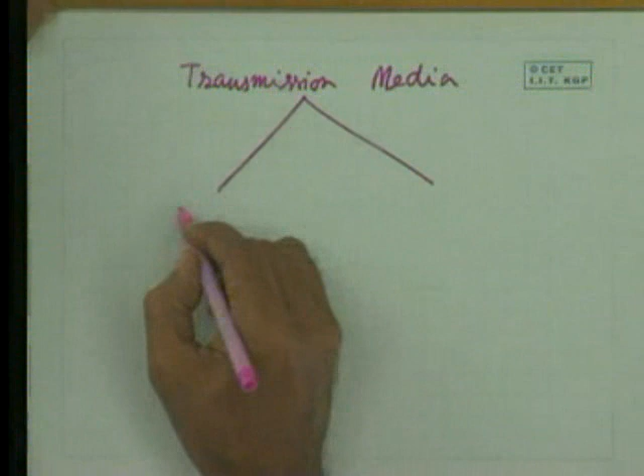The transmission media can be broadly divided into two types: guided and unguided. In both cases, electromagnetic wave is used for transmission from source to destination. But in case of guided media, the signal is guided through some solid medium.

The solid medium can be a twisted pair of wire, or a coaxial cable, or an optical fiber. In case of guided media, the media plays an important role in the transmission quality of the signals. That means the quality of the signal received at the other end depends primarily on the characteristics of the media and the signal being sent.

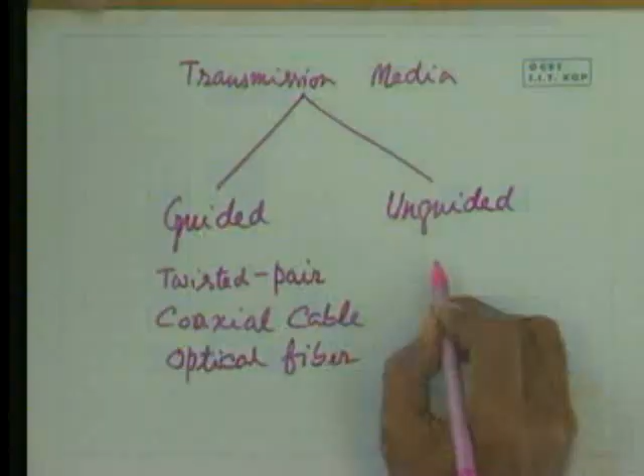On the other hand, in unguided media like air, or free space, or even seawater, the electromagnetic wave is not guided by any medium. In this case, the antenna which is used to inject the signal into the transmission media plays an important role.

So we shall consider these transmission media one after the other. Let us first consider the twisted pair of wire. Let us first look at its physical characteristics.

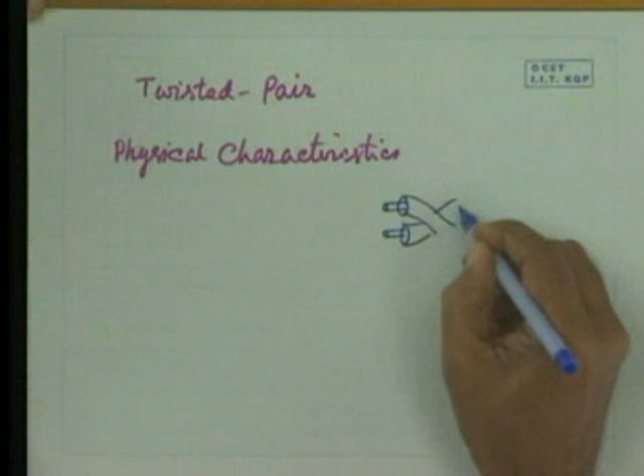In this case, you have two wires which are insulated. Then they are twisted together in a spiral form, like this.

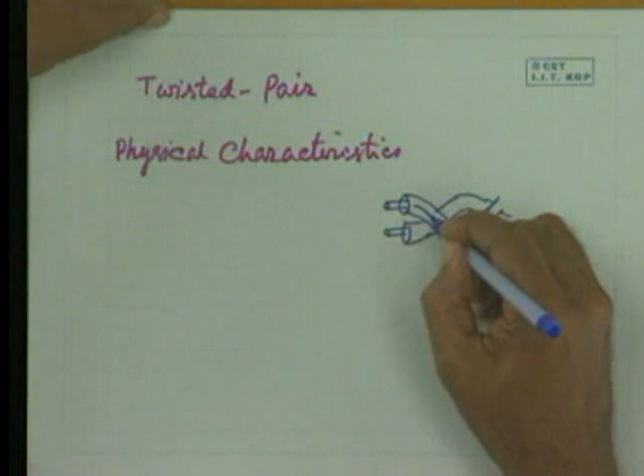You may be wondering why this twisting is necessary for a pair of wires. The reason is that when a pair of wire is used, the electromagnetic wave or electrical signal passes in one direction in one of the wires, and the return path of the signal is through the other wire, so the direction of the signal is reversed in the other direction.

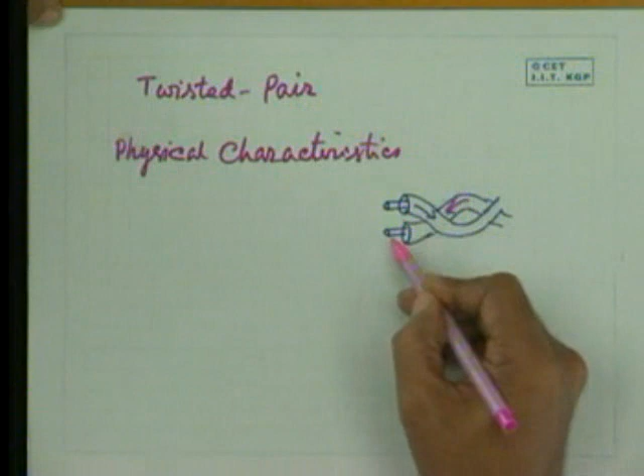So the electromagnetic radiation due to current flow through the wire is in one direction for one wire, and in another direction through the other wire. As a consequence, since they are kept at very close proximity, they cancel each other. In other words, when this twisted pair of wire is bunched together, the electromagnetic radiation will not affect other wires placed very close, or rather it will affect them in a small way if they are close together.

Usually such pairs of wires are bunched together, maybe tens or hundreds of such wires cabled together, then put inside a tough sheath of plastic and sent over a long distance. So to reduce this mutual interference or crosstalk, it should be minimized, and twisting of wire is done for that reason.

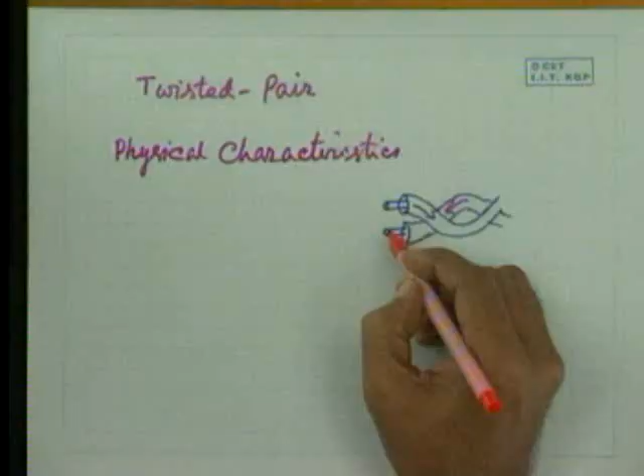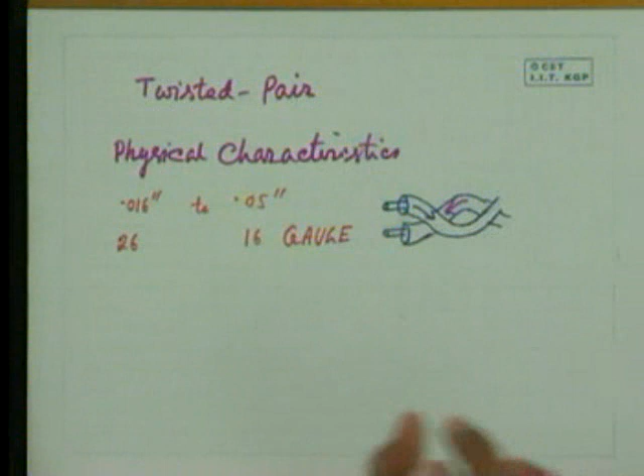Now, what is the diameter of these wires? You are using two wires. The diameter varies from 0.016 inch to 0.05 inch. Usually these are stated as say 26 gauge or 16 gauge. So the wire diameter is specified in terms of wire gauges, usually in the range 0.016 inch to 0.05 inch.

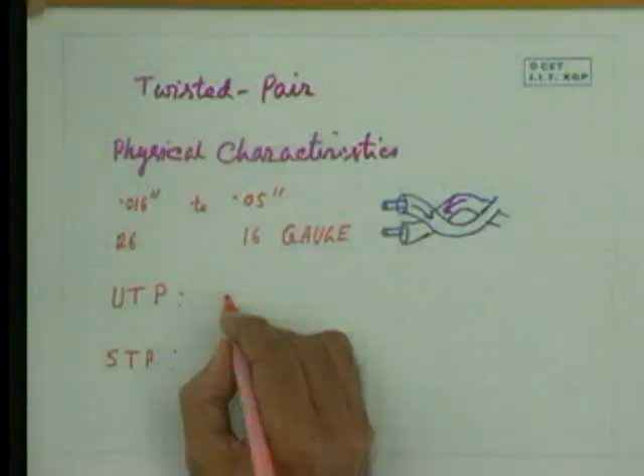Now they are available in two varieties. One is known as UTP and another is known as STP. These pairs of wires are bunched together, a large number of them, and sent over a long distance. If there is no shielding done, it is called unshielded twisted pair.

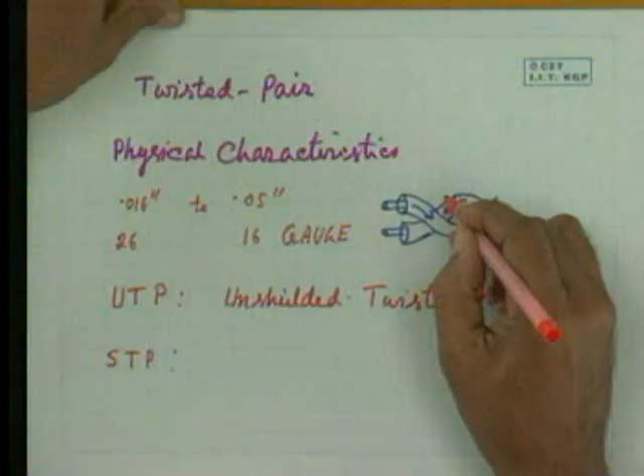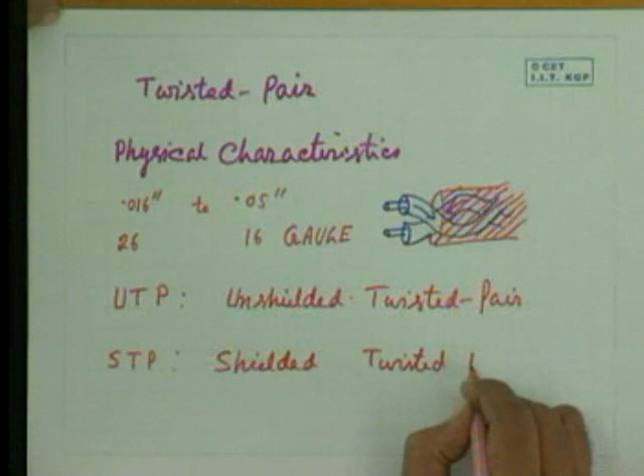But if you want to reduce external interference or crosstalk, this can be covered by a cylindrical braided shield or a conductor which can be grounded, then it is called shielded twisted pair. We shall see that the transmission characteristics of shielded twisted pair is superior to unshielded twisted pair.

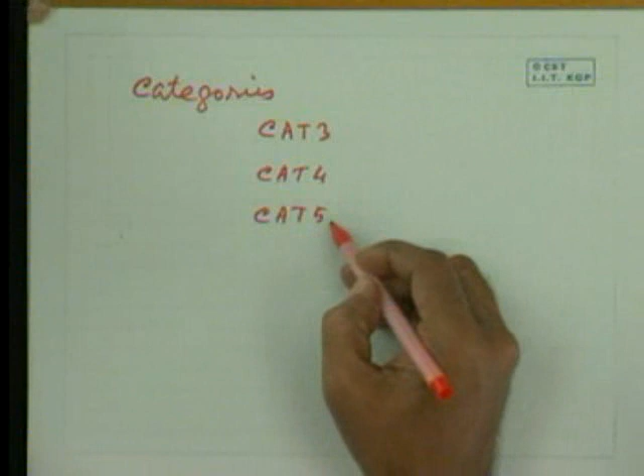Now, again, there are categories: category 3, category 4, cat 3, cat 4, or cat 5 as we usually call them. This category depends on the number of twists per unit length. More the number of twists, the better the characteristics. So in cat 5, the number of twists per inch will be more than for cat 3. Of these, cat 3 and cat 5 are quite popular.

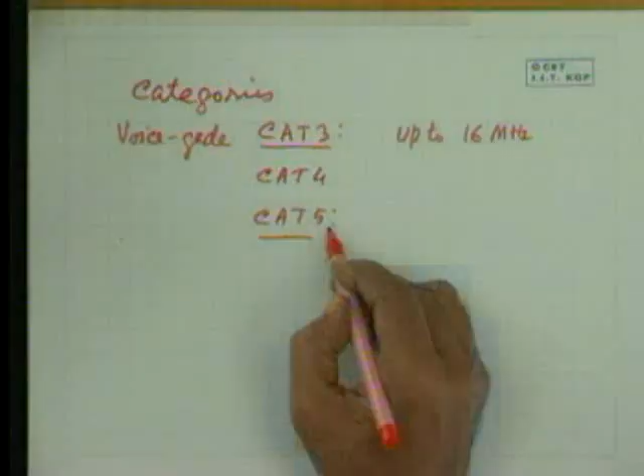Voice grade category 3 cable is widely used in various applications, as we shall see, and with this you can go up to 16 megahertz data transmission rate. Using cat 5, which is called data grade, you can go up to even 100 megahertz. So you see that the transmission characteristics depend on which category is being used. Now let us see other characteristics.

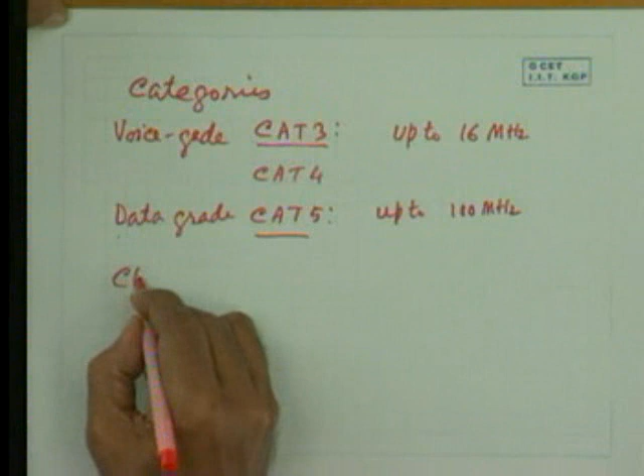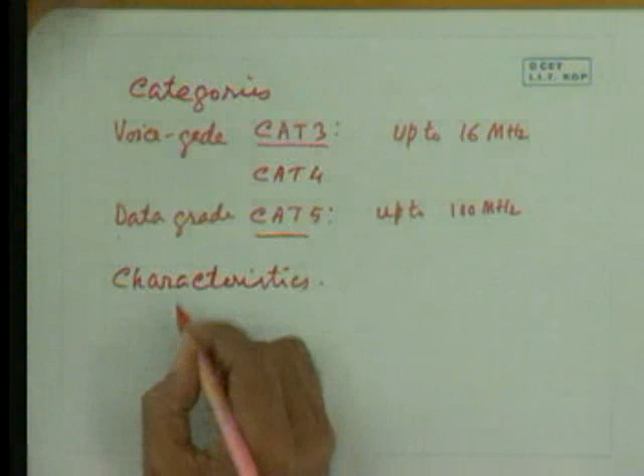One of the most important characteristics is the attenuation. The attenuation takes place as the signal traverses distance. So attenuation is expressed as decibel per kilometer.

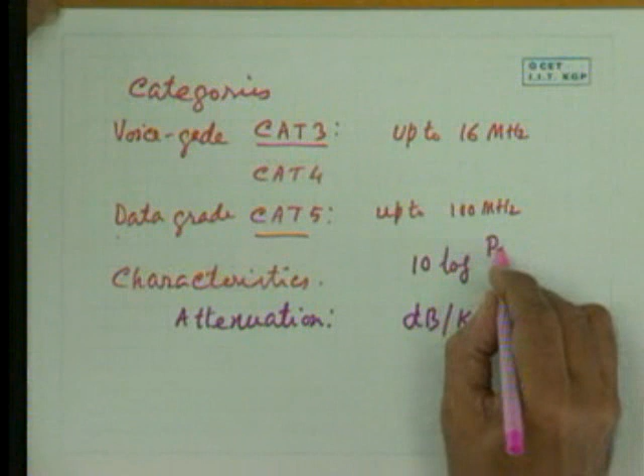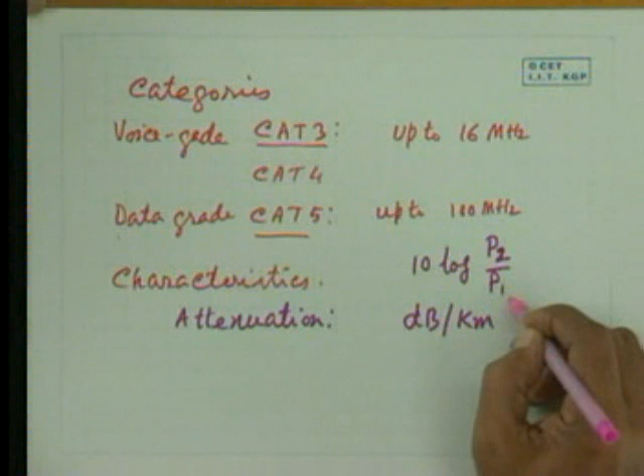What is decibel? Decibel is a unit which is expressed as 10 log P2 by P1. That means P2 is the received power, P1 is the transmitted power, then 10 log P2 by P1 is the loss expressed in dB, decibel.

Usually in case of guided media, this varies in logarithmic manner, logarithmic scale. That means if you plot in this way, say 10, 100, 1000 and so on in the x direction, and in the y direction if you plot the attenuation, it will be linear. It also varies with frequency, meaning the attenuation of the electromagnetic wave sent through the transmission media varies with frequency.

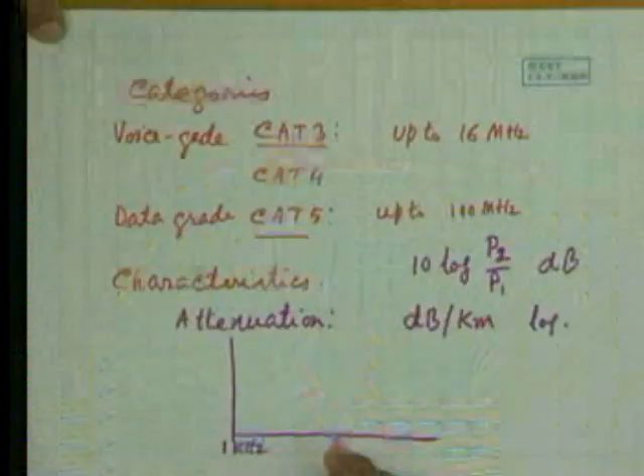Let's see the characteristic curve for this. In this scale, say 1 kilohertz, 1 megahertz, and 10 megahertz for the frequency. And here the attenuation is say 1, 10 and 100. So attenuation varies in this manner. As we see, the attenuation sharply increases with the frequency.

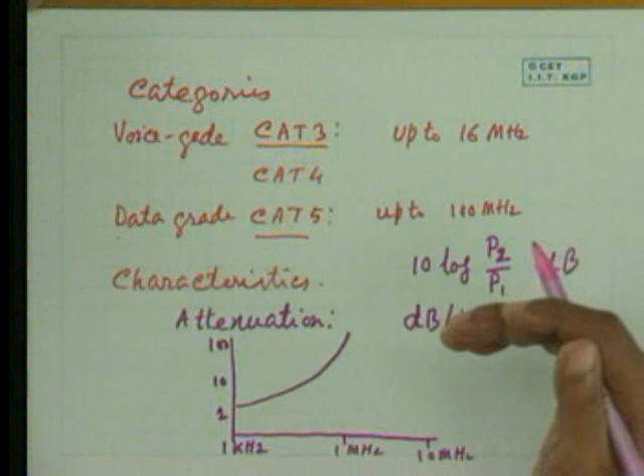That means the frequency characteristics of the twisted pair of wire is not very good. The attenuation sharply increases as the frequency increases. And that's why we shall see that the data rate has to be restricted over a limited range.

Now, if we plot the frequency, say this is cat 3, cat 5 for UTP, and this is cat 5 STP, usually called 150 ohm, meaning it is balanced, terminated by 150 ohm resistances. Frequency say 1, 4, 16, 25, 100 kilohertz, 300.

Then for cat 3, the loss is 2.6, 5.6, 13.1, that is dB per kilometer. So as the frequency is increasing, as you can see, the attenuation is increasing.

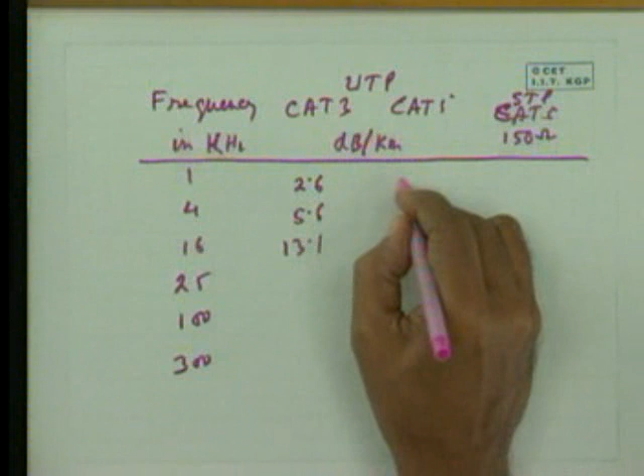Similarly here 2.0, 4.1, 8.2, 10.4 and 22 at 100 kilohertz. For STP, shielded twisted pair of wire, it is 1.1 dB, 2.2, 4.4, 6.2, 12.3 and 21.4. As I told, the transmission characteristics of shielded twisted pair is much better compared to unshielded twisted pair.

So we can conclude that for UTP or STP, or for twisted pair of wire, it has to be limited over distance, bandwidth, and data rate.

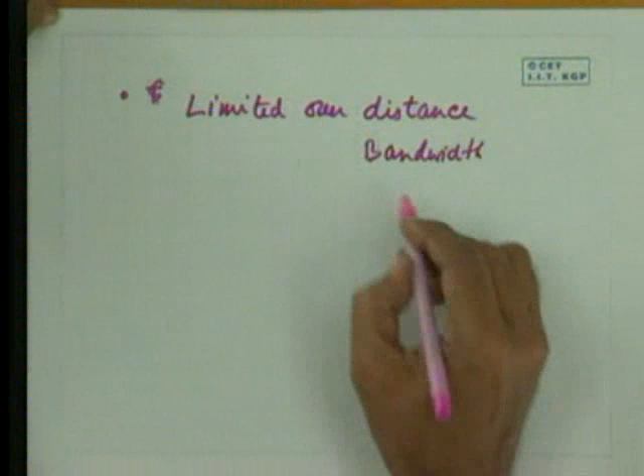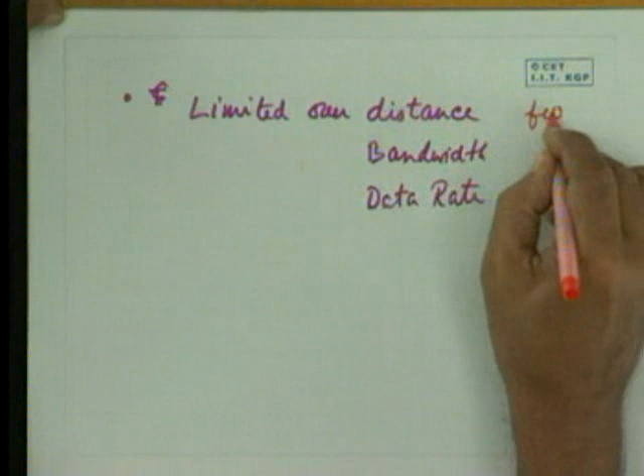Usually, distance that can be covered without putting a repeater is few kilometers. Bandwidth, as we have seen, it can be up to 100 megahertz, sorry, I think here it has to be megahertz. So unshielded twisted pair can go up to 100 megahertz. Then data rate can be, say, 100 megabits per second.

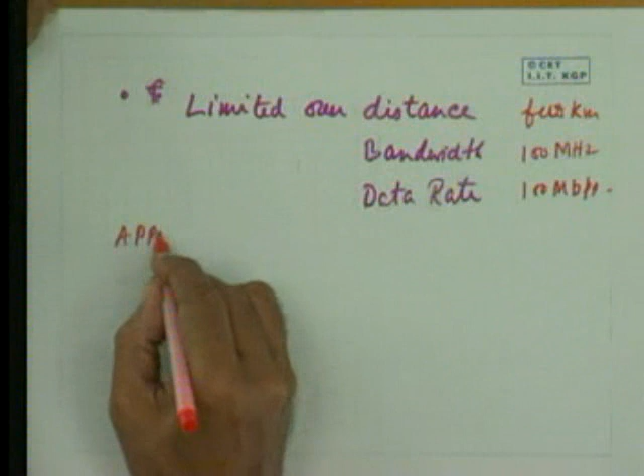Now, what are the applications of this twisted pair of wire? Twisted pair of wire is possibly the most cheap, lowest cost, and most widely used, particularly in telephony, for connecting wires from exchange to the house. Twisted pair is commonly used, and also used in telephony for other purposes, for signaling.

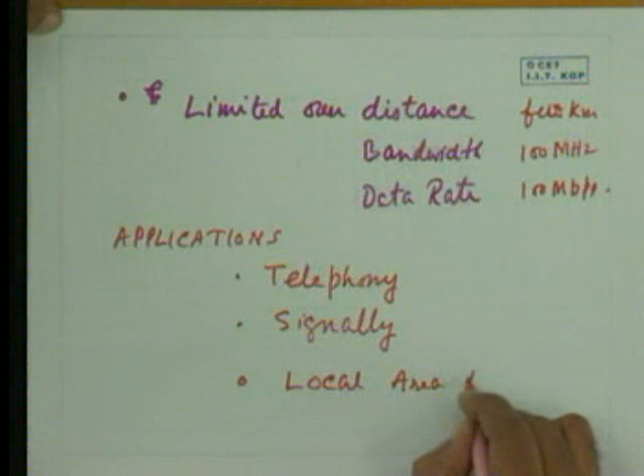Twisted pair is also used for local area network within a building, and particularly with the widespread use of structured cabling, which we shall discuss later, this twisted pair of wire is widely used.

Let us now consider the second guided media, that is coaxial cable. In case of coaxial cable, the physical characteristic is like this: it has got a solid cylindrical conductor in the form of wire. The diameter varies from 0.4 inch to 1 inch.

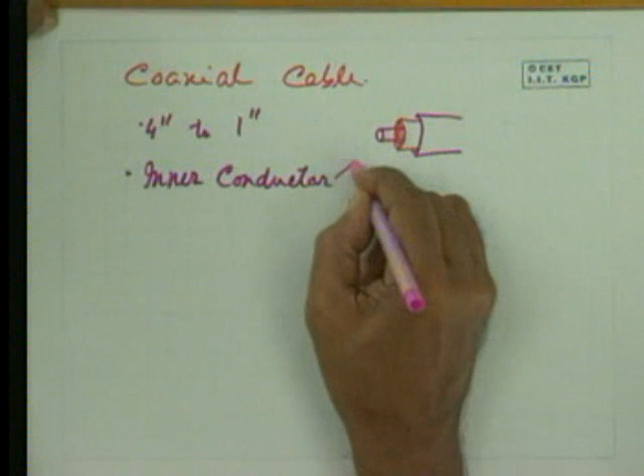This solid cylindrical wire is covered by an insulator. On top of this insulator there is another conductor in the form of a hollow cylinder. That means there is an inner conductor which is solid, and it has got insulator.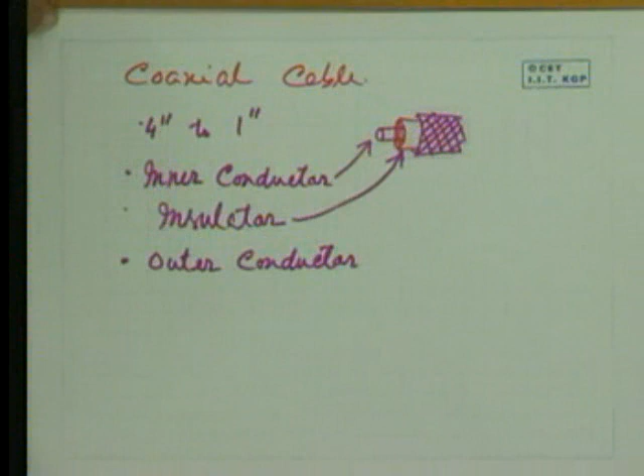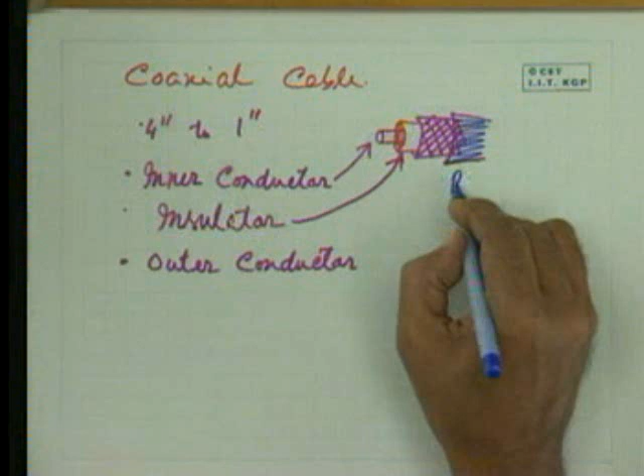Then there is an outer conductor, usually in the braided form, like a mesh of wire. And then this is covered by a plastic sheath. So on top of this you have got a plastic sheath. So this is the physical characteristics of the coaxial cable. Now let us look at the transmission characteristics.

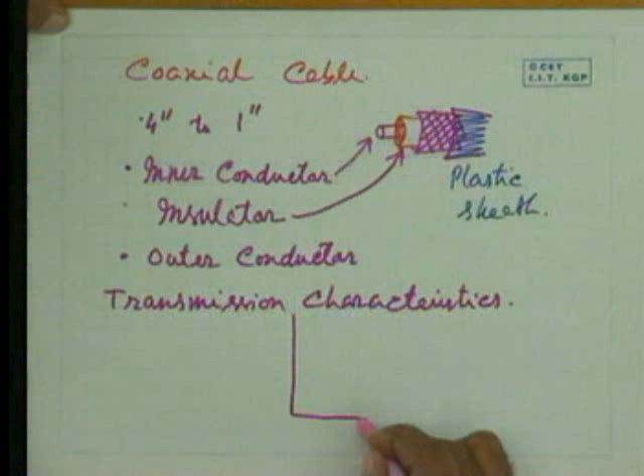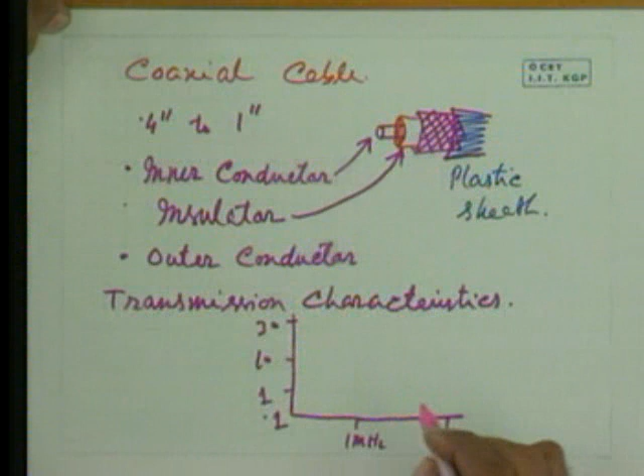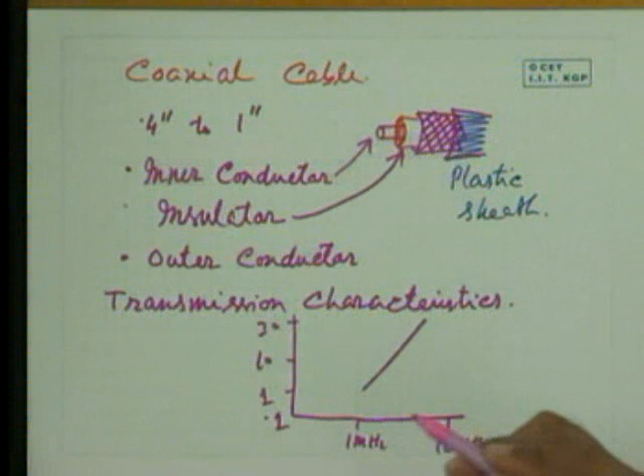So far as the attenuation over distance is concerned, it is same as the twisted pair of wire. Usually it varies in logarithmic scale, but the frequency characteristics is a little bit better, say 1 megahertz, 10 megahertz, 0.1, 1, 10, say this is 30, and it is like this. As you can see, the frequency characteristics does not change as sharply as it takes place in case of twisted pair of wire. Here it is more or less linear. On the other hand, as you have seen in case of twisted pair, it sharply increases, which is not true in case of coaxial cable. So it has got superior characteristics.

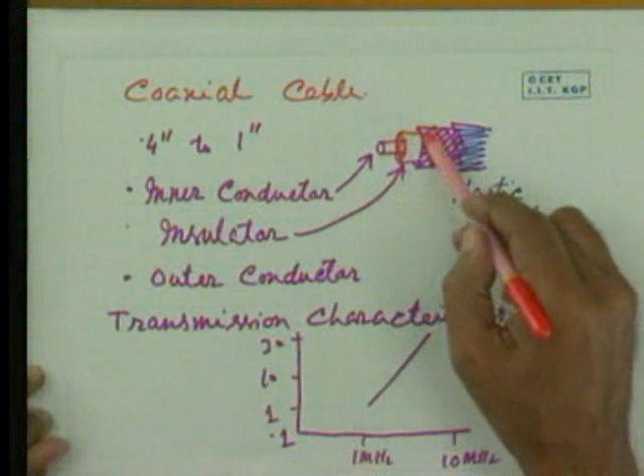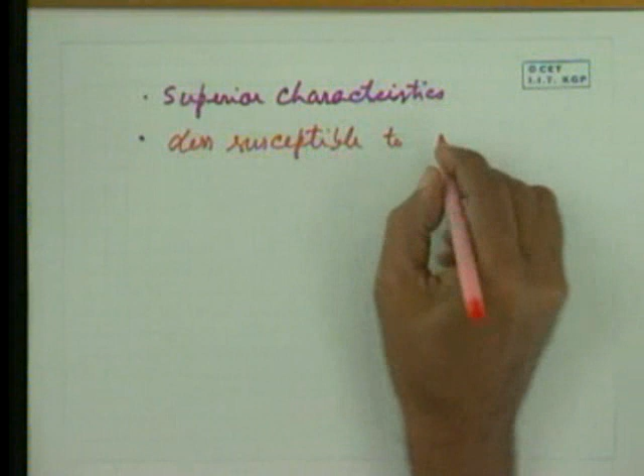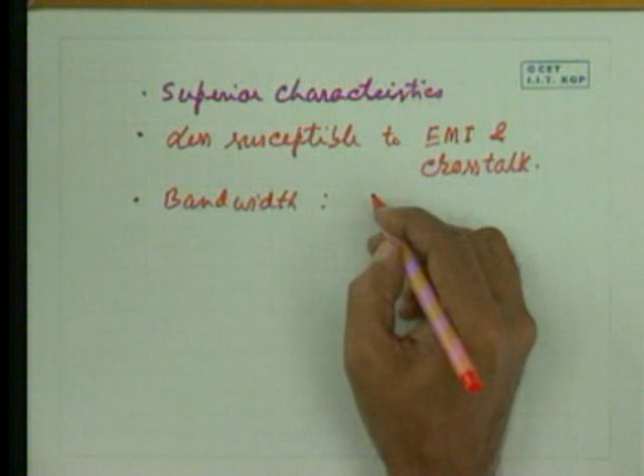Another important property is because of this shielded nature. This outer conductor is shielding the inner conductor. As a consequence, it is less susceptible to EMI, electromagnetic interference, and crosstalk. And as a consequence, the bandwidth is higher than twisted pair of wire. It is about 400 megahertz. Repeater spacing can be few kilometers.

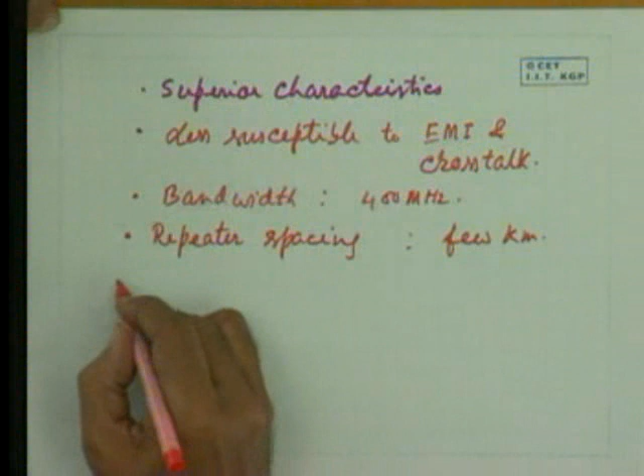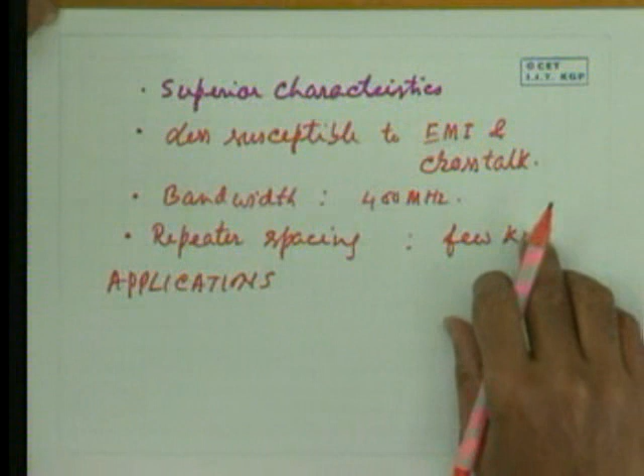Now let us see the applications. This coaxial cable is another media which is very popular, apart from twisted pair. It is another medium which is commonly used in various applications.

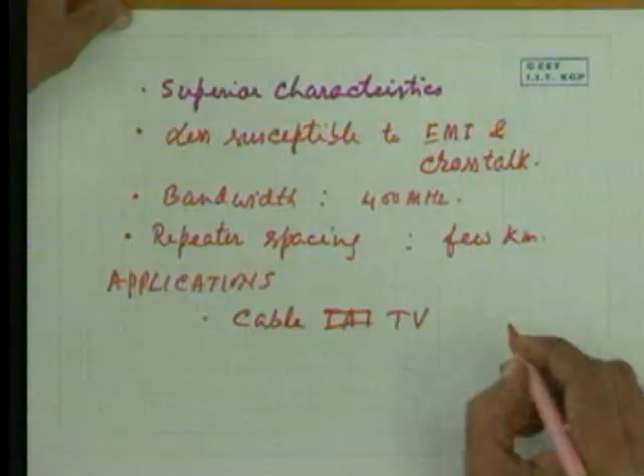Most common one is for cable TV. In cable TV, 10 to 100 TV channel signals are sent from the community antenna to different users through a coaxial cable of, say, several tens of kilometers in a small town, in a village. So the cable is distributed from the community antenna. So CATV means community antenna TV, CATV.

It is also used for long distance telephony. In long distance telephony, this can be used for sending signals over a distance of several tens of kilometers. But most popular use, as we shall see later, is in case of local area network.

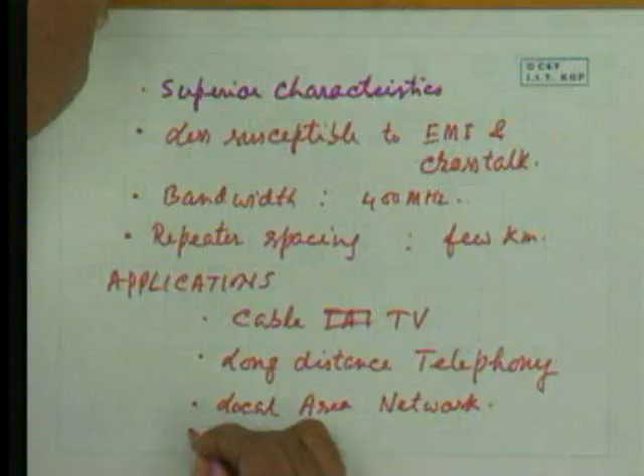In local area network, it is widely used in implementing popular standard LANs like Ethernet and also other types of LANs. Using coaxial cable some time back, a standard for metropolitan area network MAN has been developed, where coaxial cable is also used as the transmission media.

Let us now focus our attention to the third media, that is the optical fiber. Let us first consider the physical characteristics.

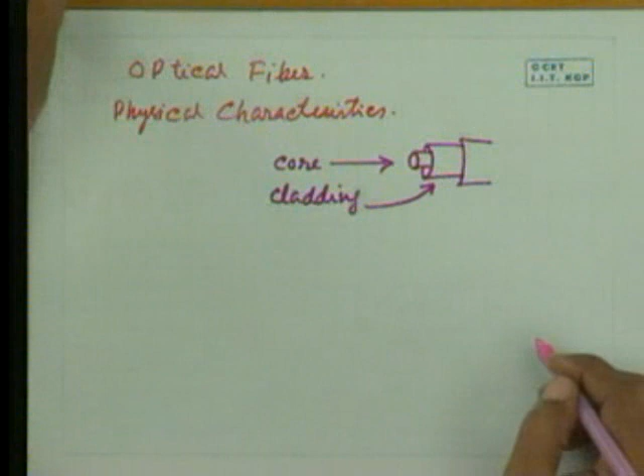Here you have got the core, a core material made of plastic or glass. This core material is covered by another cylindrical material of different optical property. This is known as cladding, and this cladding is covered by a plastic sheath that is called jacket. So you can have a cross-sectional view like this.

Now let the inner diameter be d1 and outer diameter be d2. That means the diameter of the core is d1, diameter of the cladding is d2, and the optical property, that is the refractive index n1 is for core, n2 is for the cladding. Now this n1 and n2 satisfies an important relationship: n1 is made greater than n2.

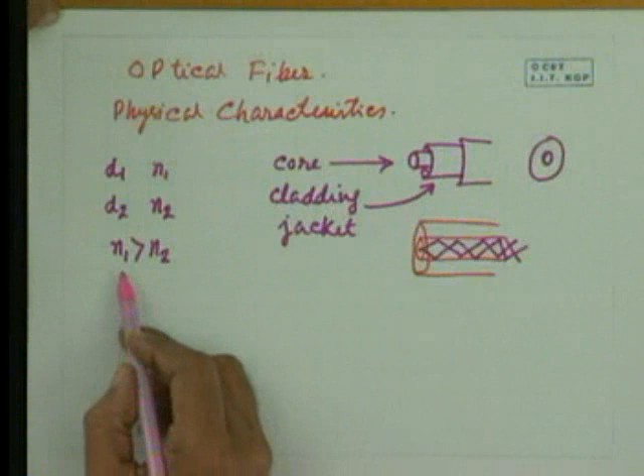This is necessary so that whenever a light signal is injected, say suppose this is the optical fiber cable, now a light signal is injected here. Since n1 is greater than n2, from your knowledge of school level physics, you can tell that this light will suffer total internal reflection like this, and without much signal loss, it will be transmitted to the other end of the cable. So the refractive index of the core material has to be more than the cladding material.

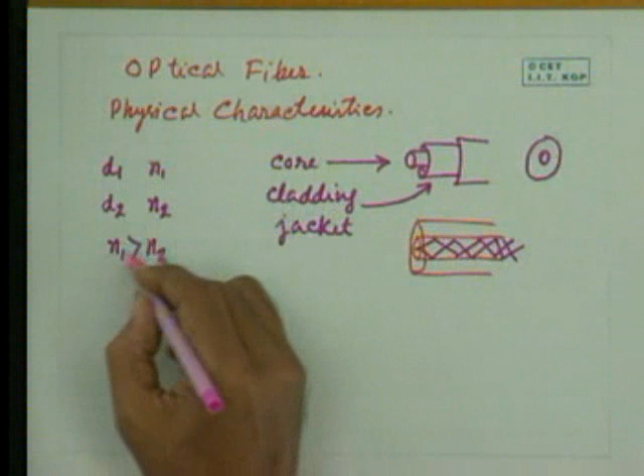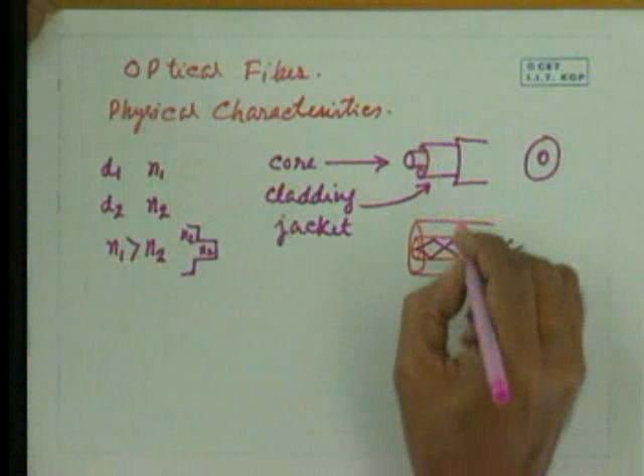Now what about the diameter? This can be represented by this relationship, this one and this one, corresponding to n2 and n1, two different refractive indexes. So far as the diameter is concerned, d1 varies in the range from say 50 to 200 micrometer, that means 10 to the power minus 6 meter, and d2 varies from 125 to 400 micrometer. One popular type which is commonly used has d1 equal to 62.5 micron and d2 equal to 125 micron. This is one popular type.

Here, as you can see, the refractive index of these two materials are distinct. So there is a step change in refractive indices when the signal goes from this core material to the cladding material. That's why it is called step index.

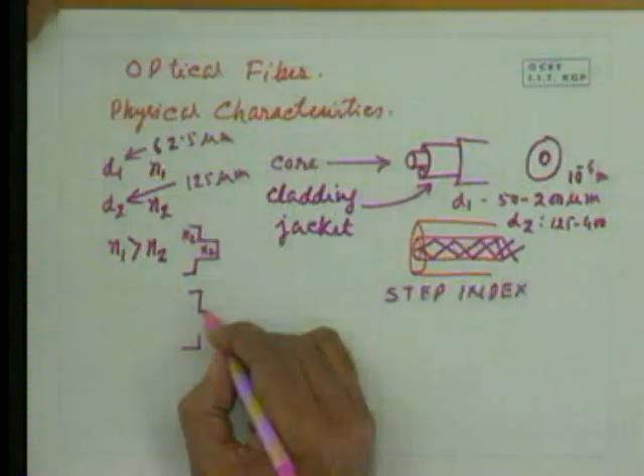There is another possibility. What can be done? The refractive index of the core material can vary slowly, and it can be highest as it approaches the core. So it is like this, meaning it is maximum at the center. Say this is the core material: the refractive index is the highest at the center, and then it is lesser as you go to the outer edge of the core material. Then of course you have got the cladding of different refractive index.

What will happen to the light when it is injected here? The signal will pass in this manner, transmitted in this manner. Instead of sharp reflections, it will bend slowly and go from one end to the other in this way. So the characteristics of the optical signal is quite linear. So this is called graded index.

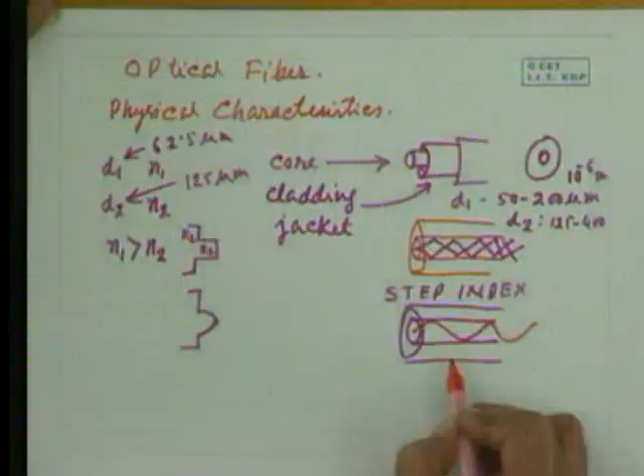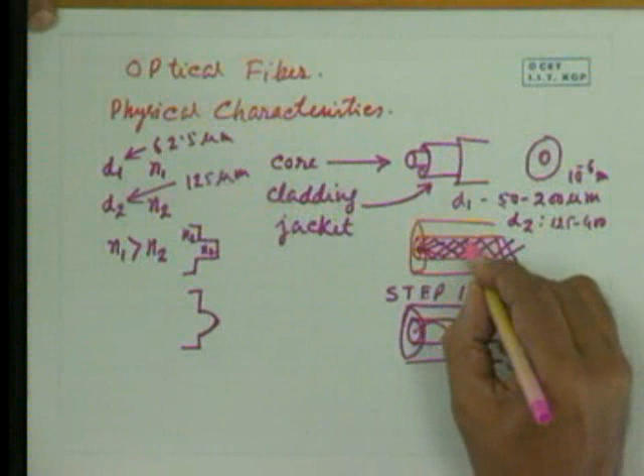Now let us look at another property of optical fiber. Because of this diameter of 50 to 200 micron, a large number of optical rays get reflected and travel to the other end. Since different rays have different path lengths due to the distance traversed inside the core, after some distance the quality of the signal will deteriorate, so it will not be good.

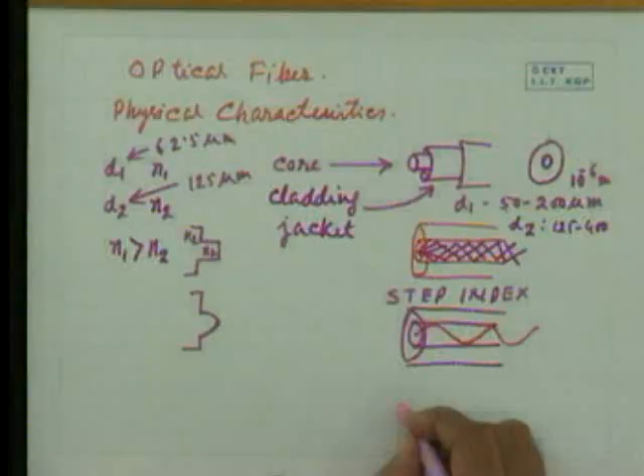How can this be improved? This can be improved by using a very small core diameter, of the order of the wavelength of the optical signal, about 8 to 10 micron, while the outer cladding diameter is fixed at about 125 micron. It is still step index, but very small in diameter, and in this case we can visualize it as if a single ray is getting transmitted from one end to the other instead of multiple rays. That's why it is called single mode fiber.

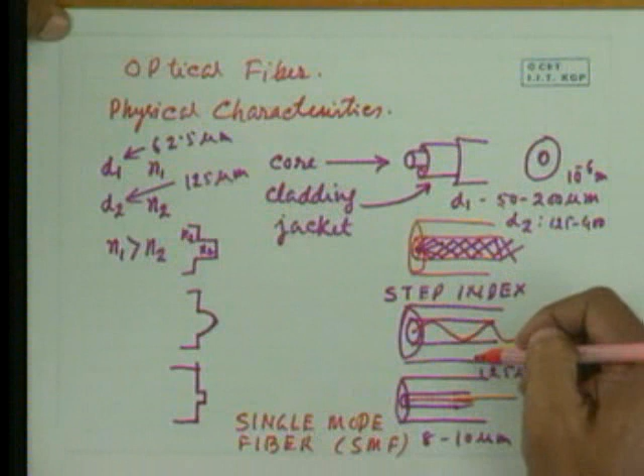So SMF. On the other hand, the other type is called multi-mode fiber, because multiple signals are getting transmitted, MMF.

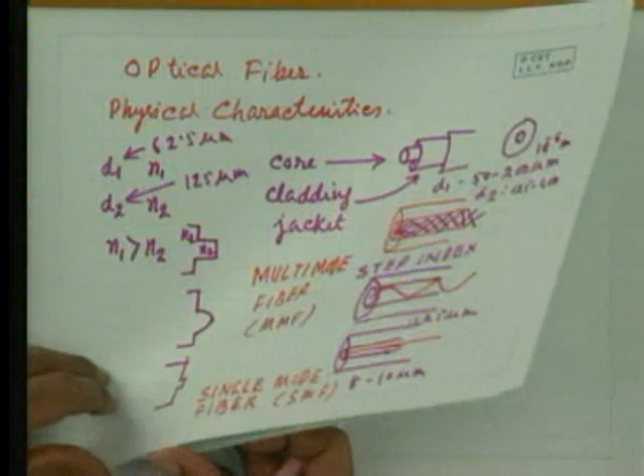Now, what kind of light source is used? In case of multi-mode fiber, the light source is usually LED, light emitting diode. This is the source of light, and as detector you can use a photodiode to convert the optical signal to electrical signal.

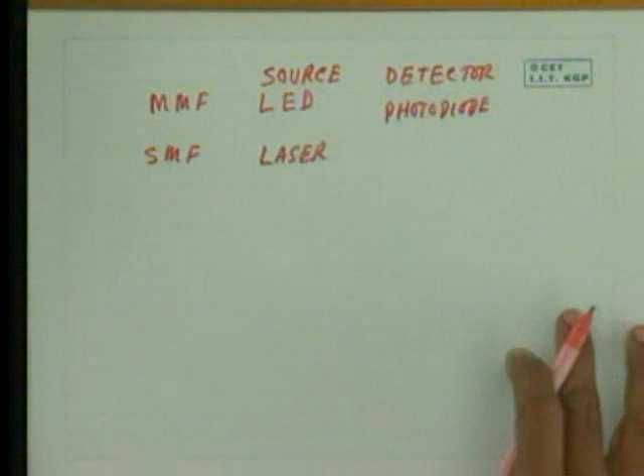For single mode fiber, the light source is laser, and you can use a photodiode, same thing, as the detector of the light.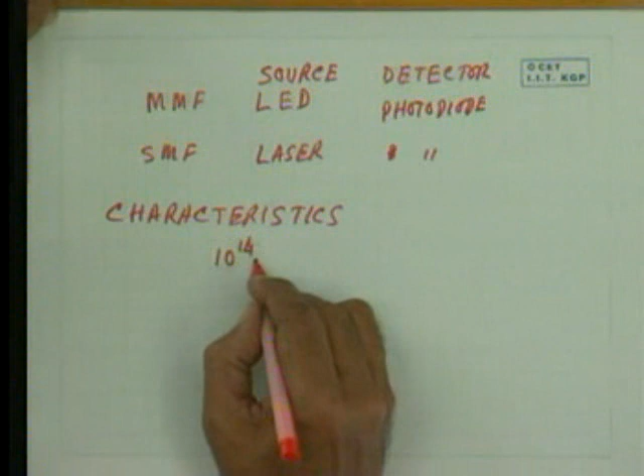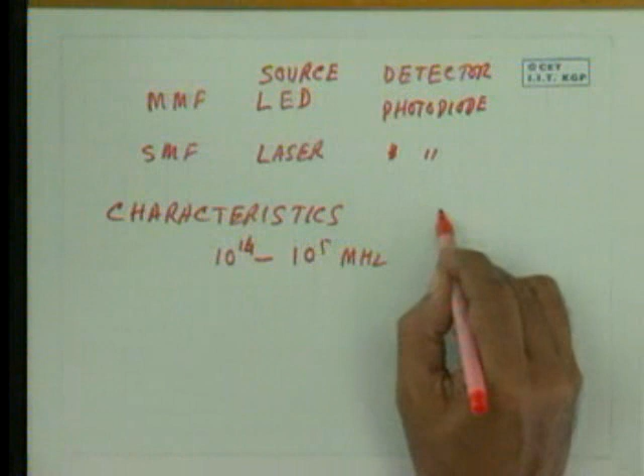Now let us consider the characteristics of this optical fiber cable. The optical fiber cable gives you bandwidth, that means the signal goes from 10 to the power 14 to 10 to the power 15 megahertz. This is the range of the signal that can pass through the optical fiber, and the attenuation characteristics is like this.

So this is 1 terahertz and this is 10 terahertz, this is 0.1 and this is 1 dB per kilometer. On this side it is 1 terahertz, 10 terahertz, and it has been found the characteristics are like this. So over a narrow band, the signal can pass without attenuation through the optical fiber, and this narrow band is 10 to the power 14 to 10 to the power 15 megahertz.

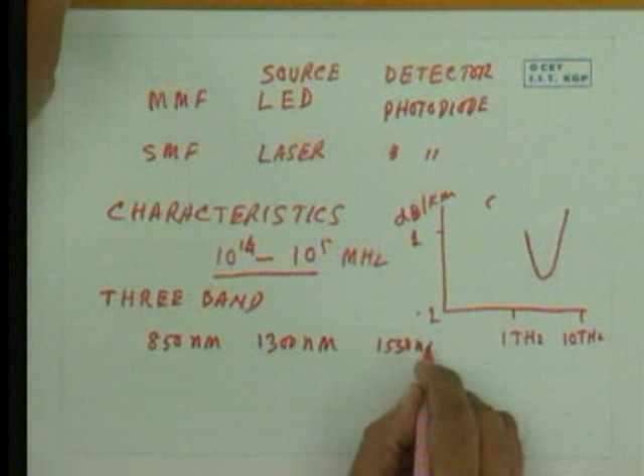Usually 3 bands of frequencies are used. These 3 bands are 850 nanometer, 1300 nanometer, and 1550 nanometer, that is the wavelength of the signal commonly used. So these 3 commonly used signal bands are used in case of optical fiber.

Here, for 850 nanometer, the light source is LED. In the other 2 cases it has to be laser. Using 850 nanometer, you can go up to 100 megabits per second, and using 1300 nanometer and 1550 nanometer, you can go up to 1000 megabits per second.

So we have seen that optical fiber provides higher bandwidth, lightweight, low attenuation, and since the signal is optical in nature rather than electrical, it is immune to electromagnetic interference, EMI. So it is much less susceptible, or not susceptible, to external electromagnetic interference.

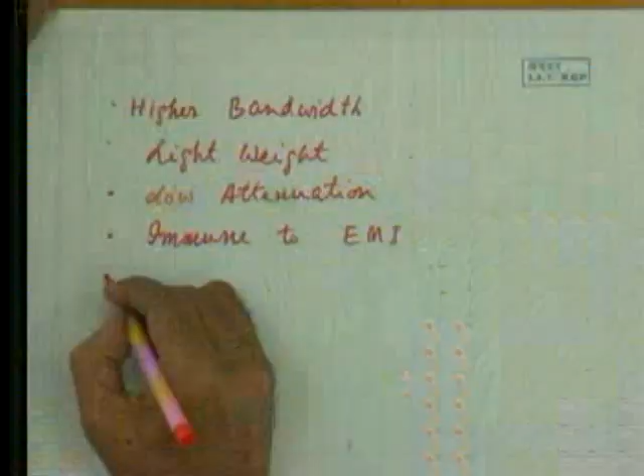It also provides greater repeater spacing. For multimode fiber, repeater spacing can be 2 kilometers. For single mode fiber, it can be 20 kilometers.

Another important property is it provides much higher security. In case of twisted pair of wire, or coaxial cable, when the cable passes outside the building, there is a possibility of tapping. But in case of optical fiber, there is no possibility of eavesdropping. It is not possible.

And finally, the applications. So far as applications are concerned, optical fiber is used in telephony. Optical fiber cable can be laid over hundreds of kilometers, even under the sea, to link different countries. The second most important application is in high speed LAN, as we shall discuss later.